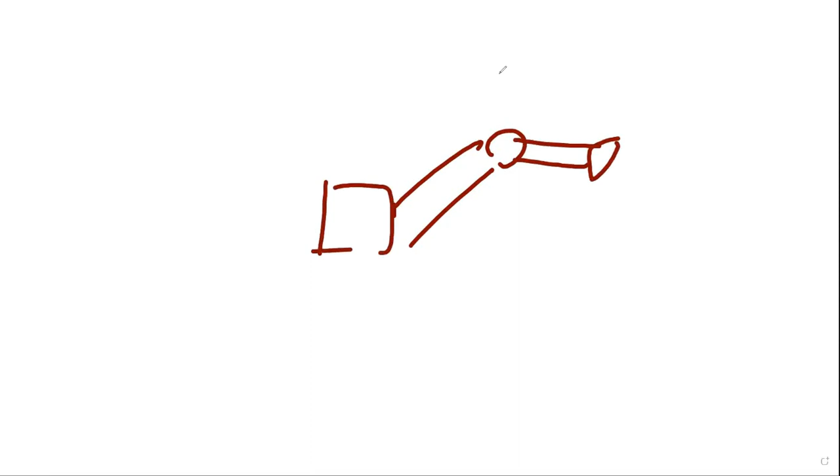One is the manipulator system, so you do have a robot arm to pick up something, and you do have the tractor, wheel, or leg. That is the vehicle part. So both the robot arm part and the vehicle part have a feedback loop.

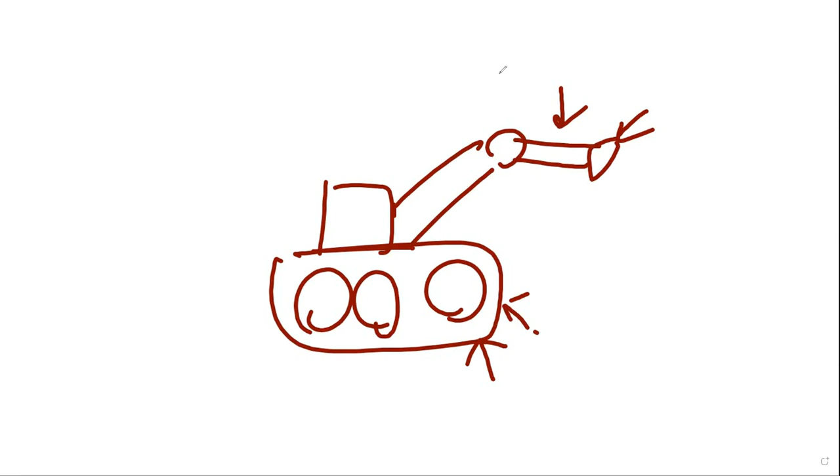And you may have a vision unit, audio unit, or ultrasonic unit to sense the environment. Once you sense the environment, you need to build a 3D model for your environment, so you know where you are, what is the obstacle, and how you should move your arm to reach it, or decide to give up. That's actually a system that helps you to manipulate your system.

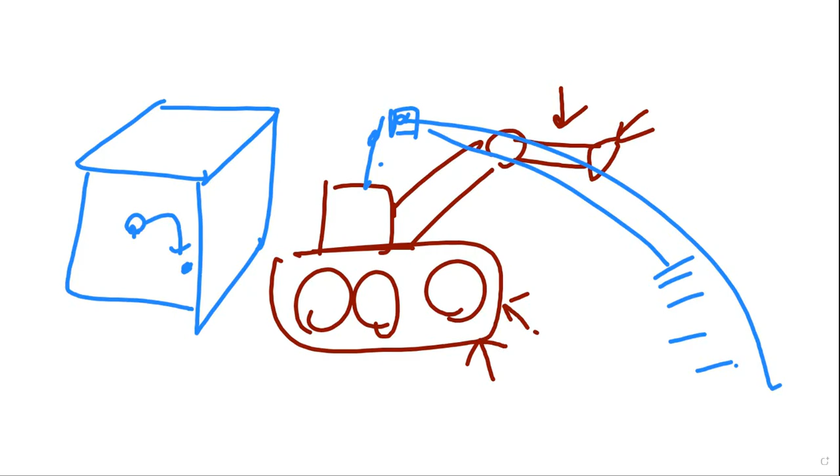So the mobile robot, in a way, is actually talking about the vehicle part. The vehicle part is the wheel. Sometimes it's the wheel, sometimes it's a leg, sometimes it's a rocket or propeller system. Whatever system it is, it just helps the robot move its body from point A to point B. That's the mobile robot.

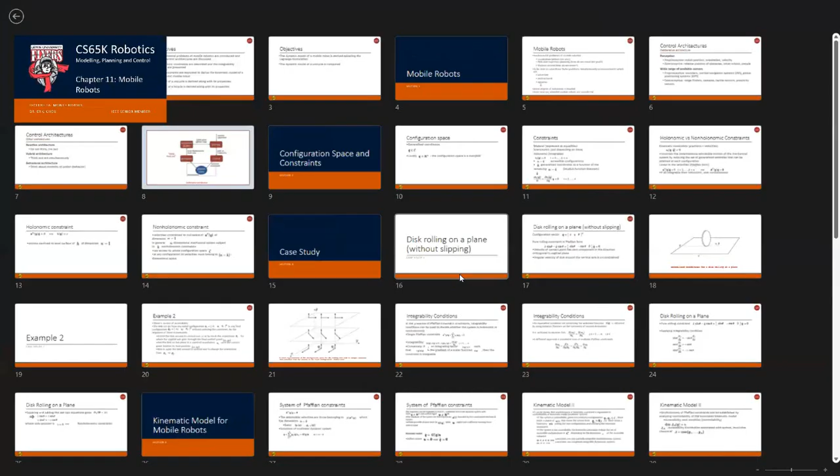And the same thing, you will have the sensor portion to sense the environment, and you need to build up the 3D model of the environment and feed it back to the whole system to try to sense it. So in a way, it's similar to computer graphics, because the image that you take from the environment will be fed back to your computing model, and the computing model is your understanding of the environment.

So here you need to move your vehicle, say maybe a bicycle or unicycle, to move along the path and then avoid some obstacle, something like that. So you need to build a model for it.

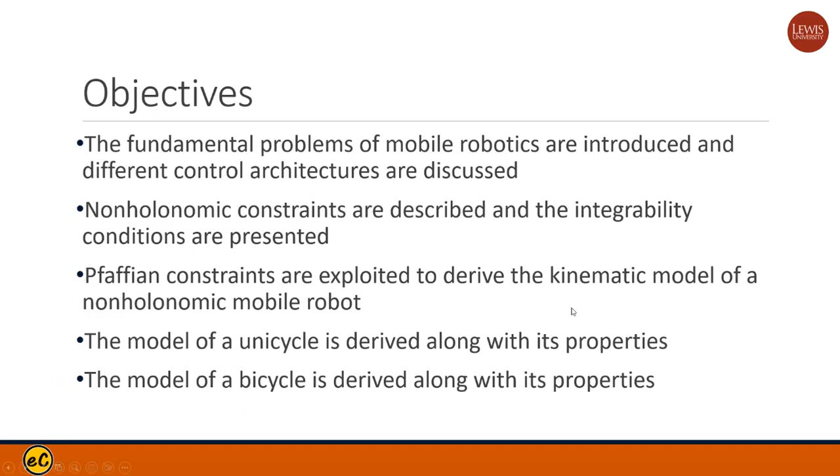So mobile robot's fundamental problem is the localization of where the robot is, the path and trajectory planning, and motion control - how much power needs to be applied to the motor, the torque, the force, how fast should I move my wheels - so as to be able to solve these problems simultaneously in an environment which is uncertain.

Uncertain means that you may be in a battlefield, so your environment at one second is this way, but the next second the whole environment may be being bombed. So the environment may change in a second. Let's consider, for example, that you have a robot combat system in the Ukraine area, and it's actually an autopilot car, or an autopilot tank, and the environment keeps changing because suddenly there will be some change in the landscape.

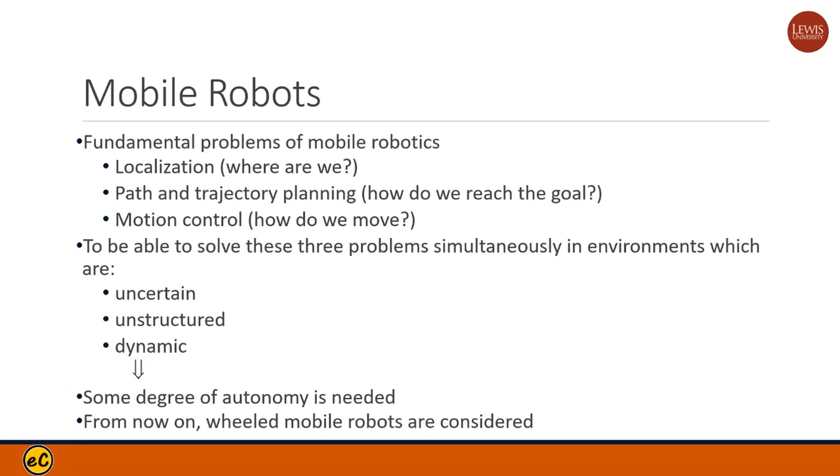Suddenly your enemy may be moving, and there may be some obstacle that just dropped. So the environment is dynamic, and your visibility may drop because they may give you some smoke to block your vision or your ultrasonic sensor. So basically you need to take care of all the sensor information and try to come up with the best estimation of the environment and make the right move.

So basically, perception is very important. Perception is the robot's position, orientation, and velocity.

Proprioceptive, and then you need to know about exteroceptive, that's the relative position of obstacles and other robots. You need to know where you are, and you also need to know where other people or robots are. You build up your environment using modeling, using your sensors and information, using GPS, rangefinder, camera, tactile sensors, or proximity sensors, and build up your model for the environment, and then operate your robot in that environment.

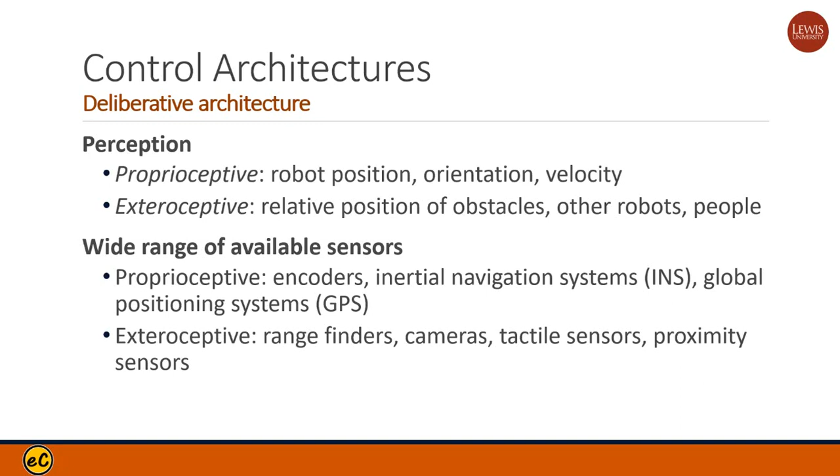So there's reactive architecture, which does not think. Reactive means you do not have planning, you just sense the data and react, that's the reactive architecture. There's also hybrid architecture, which has sense, planning, and react systems combined. That's hybrid. And there's another one that's purely behavioral architecture.

Behavioral architecture is somewhat like an event-driven type of architecture. There are many event-driven handlers, and once an event happens, you trigger something. For example, a counter or anti-missile combat system: a missile comes in, closes into a certain range, then you fire your anti-missile to try to shoot it down. That's behavioral architecture, driven by automatic detection.

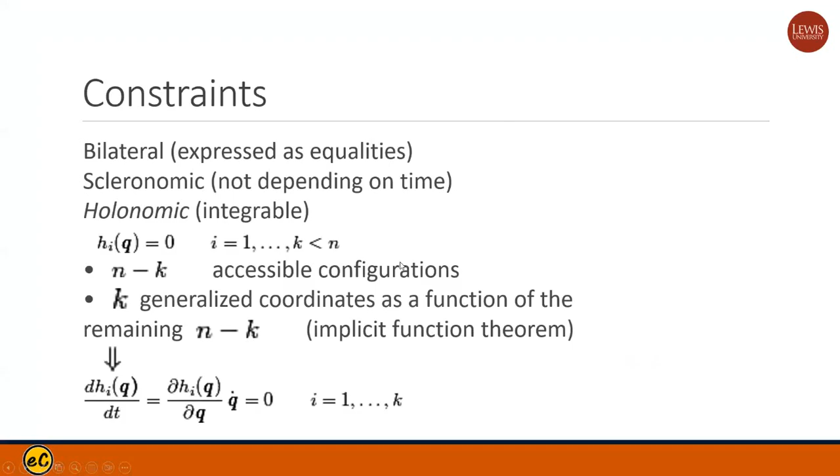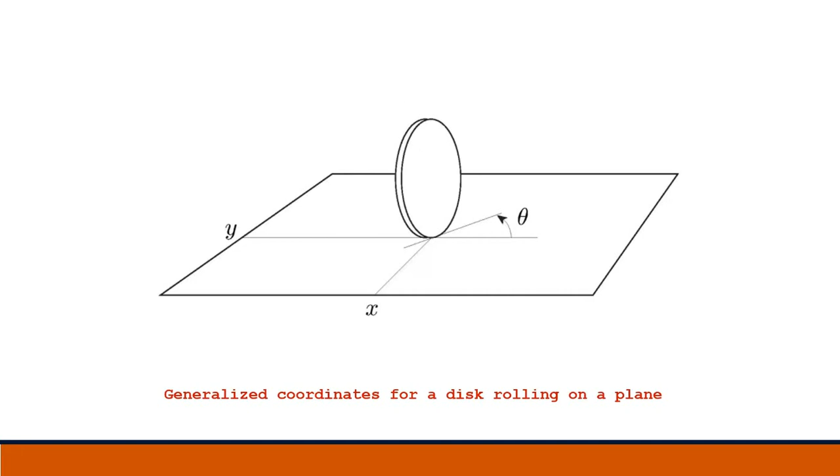And here we do have some math, but this portion I will actually just bypass, it's too much. You have a disk rolling on the plane, and there's a controllable parameter called theta, and you can control the rolling to achieve it. These are more complicated math that we'll try not to go into detail on.

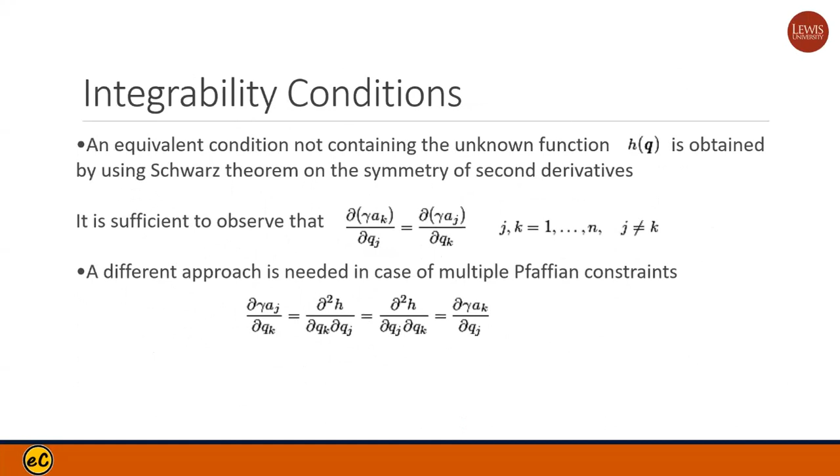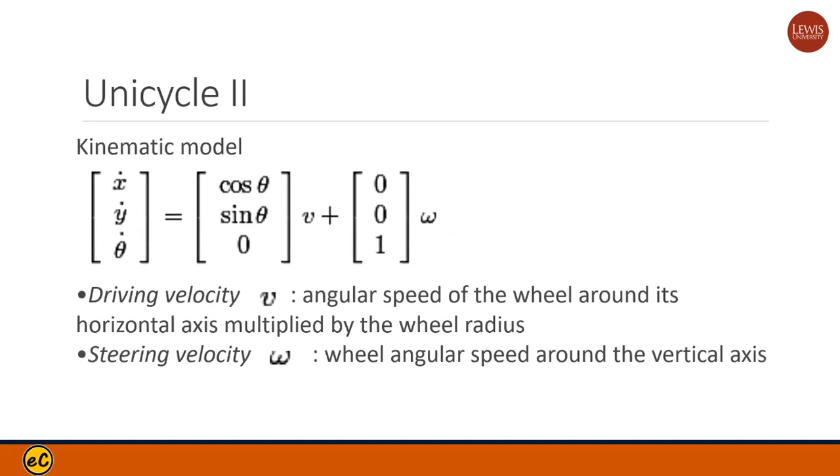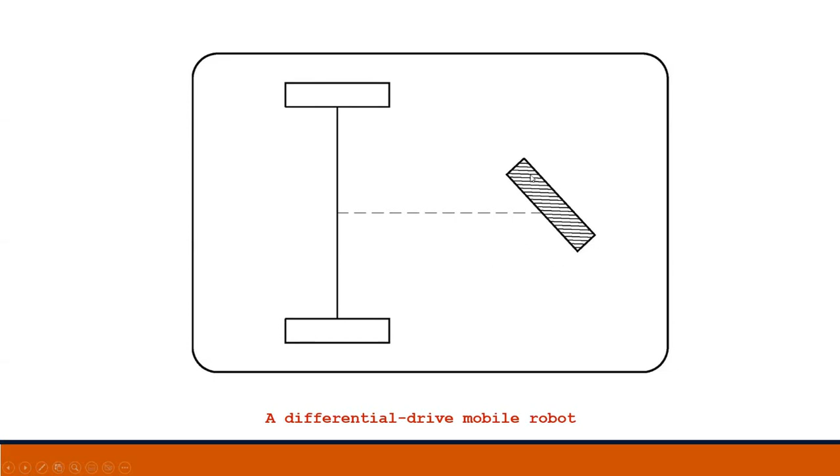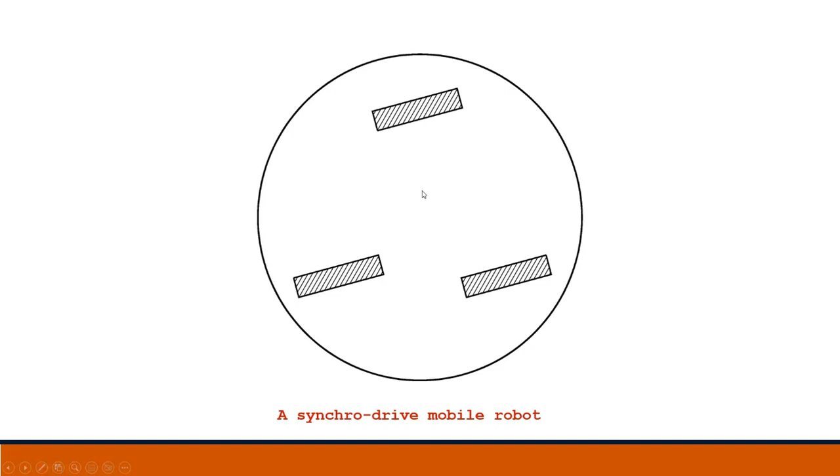Unicycle: only one wheel is actually the controllable unit. The other two wheels may be moving, but they have no control of theta, and they are not driving. So this is a one-wheel self-driving robot vehicle. You can also have a synchronized drive, where all three wheels coordinate their motion at the same time. And you may have a bicycle with two wheels that you can control, with some mathematical model.

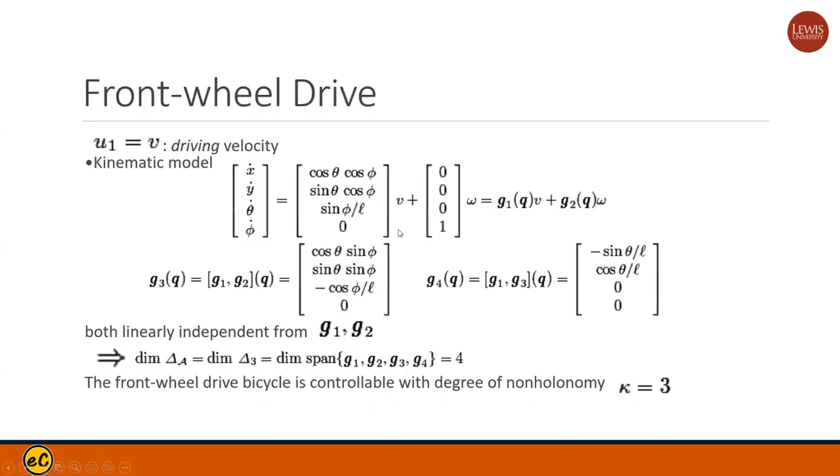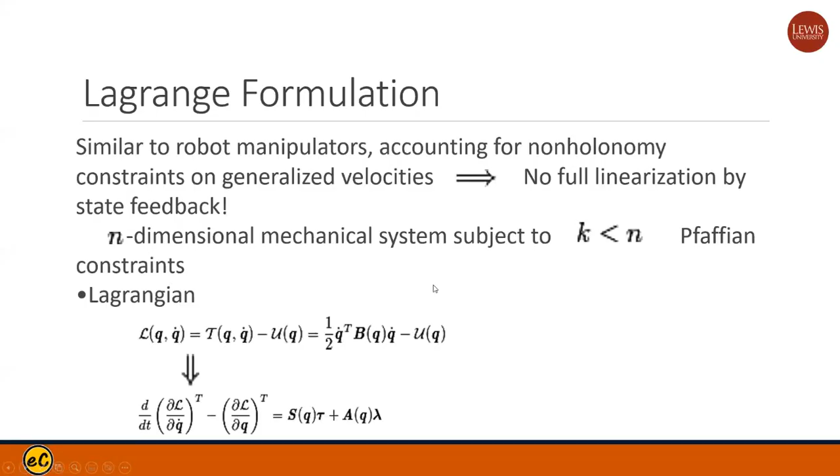And tricycle, three wheel, four wheel systems - your front drive car or back drive car is something like this. This formula I'll try not to go into those details, it's too much, it actually takes a long time to understand it.

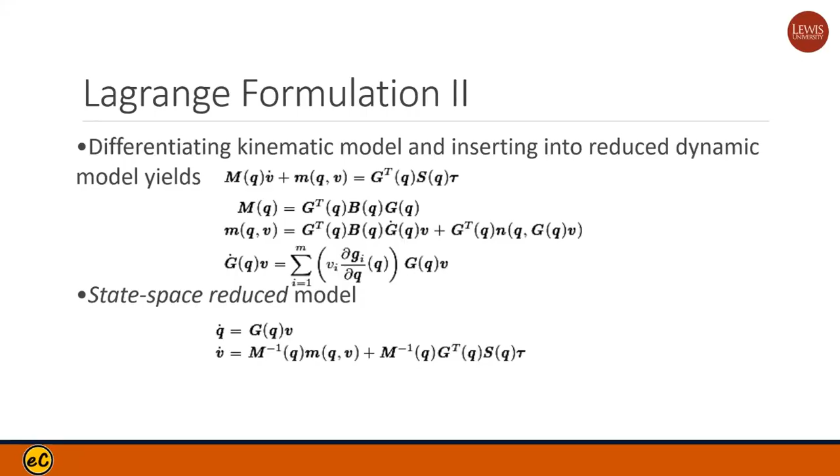So here we basically roughly went through this whole chapter. The key point for this chapter is we try to sense the environment and then move your vehicle to the right location.

And then let me go back to here. Last time we did low level control. Let's look at robot control now. So for robot control, we're not talking about low level control, that's actually a feedback loop.

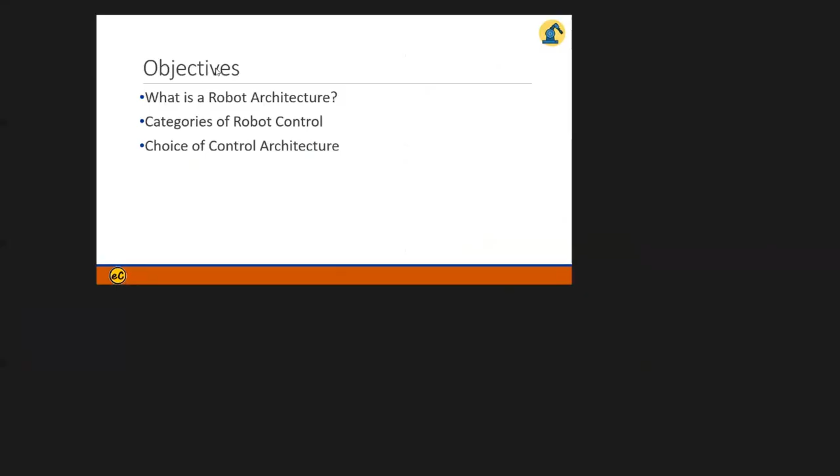There's a PID controller, and a high level controller is a finite state machine or microprocessor. So in a way, you will program your robot to control your feedback loop and also your robot motion. So that's the architecture we have.

So robot architecture is similar to computer architecture. Computer architecture is the architecture for a personal computer, and robot architecture is the architecture for the robot. So in a way, robot architecture is also an extension of computer architecture. Your computer architecture comes with an operating system operating on your instruction set, and the same thing applies for robots, you have that whole set too.

So you can build your robot using ASIC, application-specific integrated circuit, or you can build a microprocessor using robot OS. ROS is robot OS, using robot OS to build a robot.

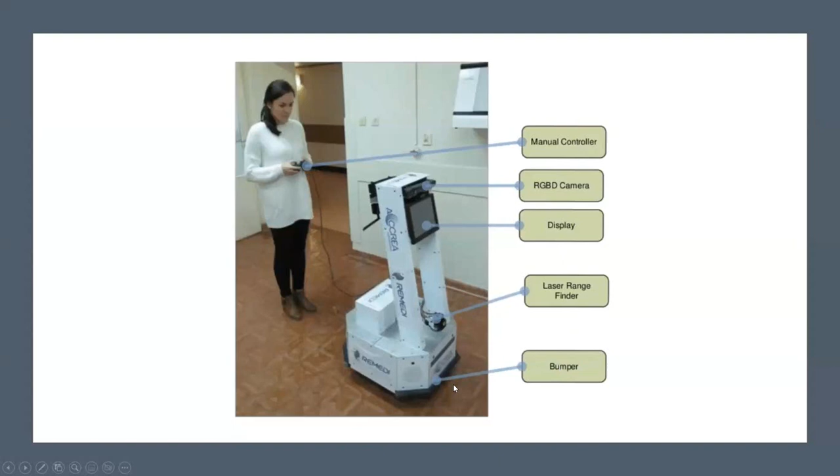Your control has hierarchical control: there's sense, plan, and act. You have the relative reactive control. Reactive is you sense and react, sense and react. Someone hits you, you counterattack.

That's reactive. And then traditional is the sense, you do planning, how far the enemy is, and then take action. That's a hierarchical way. And the third one is behavioral based.

Behavior based is the event-driven one. You sense, plan, and act, but you will choose the right one to act. So it's somewhat like you choose the right event handler to run your robot operations.

And you can also design it so that it's a hybrid. Hybrid means that you are partly deliberative with planning, partly just reactive. Reactive control is faster because you sense and you react. The hierarchical or behavioral based takes longer time because you need to use the computer to do planning. So the hybrid one actually combines the two.

Sometimes you use direct sensing and react, sometimes you actually add the planning into it. So this one is actually different. But nowadays, because of AI, the planning becomes not just using the algorithmic method, but maybe also using the AI approach, machine learning approach.

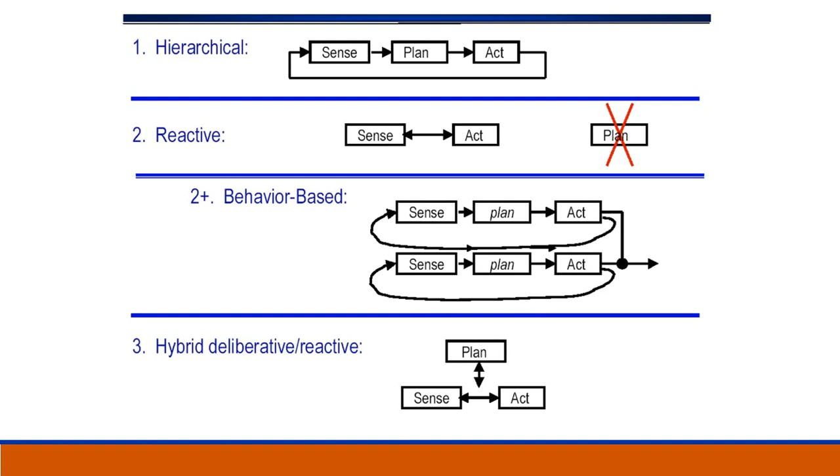So this portion, because of the advancement of the microprocessor, the performance of such architecture is more robust than before. So these are different categories of control: deliberative control, reactive control, hybrid control, and behavior-based control.

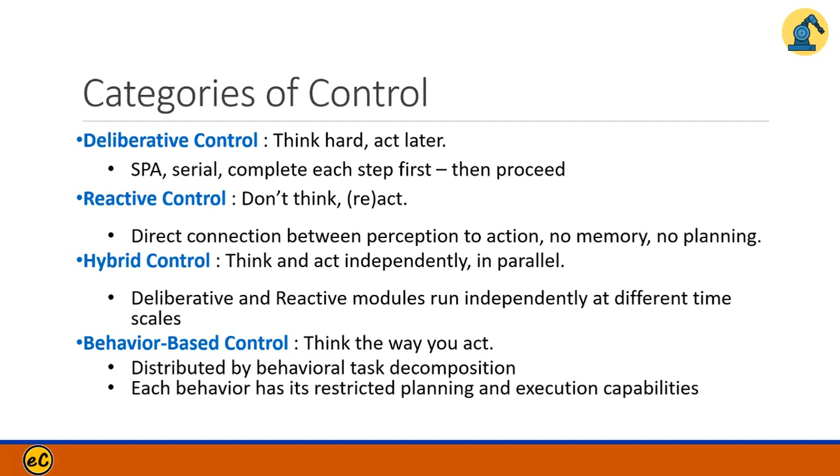So you have sense, plan, and action. This is the deliberative paradigm. Sense the world, update the world model, and then generate a plan. This is typically the deliberative paradigm. The problem is the planning would be the bottleneck.

It is a computer, it is a microprocessor, a computer, so it takes longer time. If your planning takes too long, and this planning may also involve AI, it actually depends on the decision quality and how much time or latency you can tolerate.

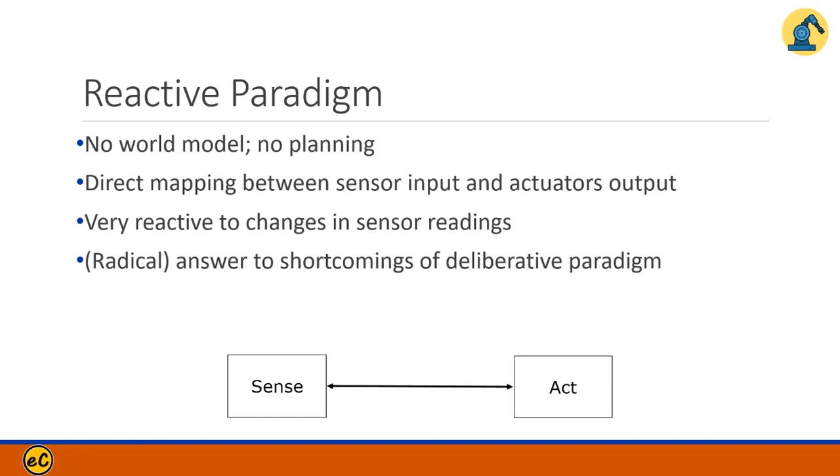Reactive is that you do not do planning; it just senses and counterattacks. So it's faster, but the problem is that the decision is sometimes very poor because you do not think about it. So in terms of process speed, reactive is faster. In terms of decision quality, deliberative is better.

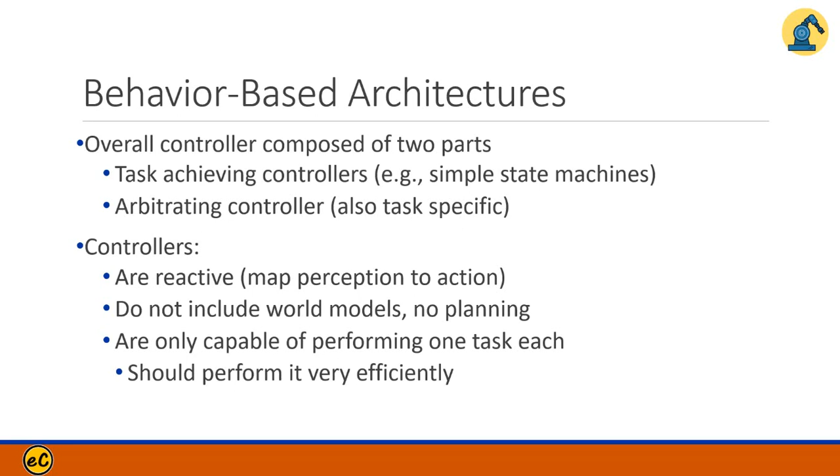And the behavioral based architecture is that, it actually has planning, but we can have multiple processors to do it in parallel and take different events in different ways. We have an event-driven way of doing it, and then we have an arbitration. The arbitration will decide what I should do.

So as a robot, you can push the door, go through the door, approach object, or follow a wall. So these are four different plans, four different events that you may be calculating. And the arbitration will pick one for your robot to use.

So behaviors are the basic building blocks for robotic actions. You can consider these behaviors are the functions, the methods, the basic event handlers for a robot. Behaviors support good software design principles like modularity, so you can update one behavior at a time to update your robot operations.

So here you do have an arbitration. Different behavior-based architectures have different approaches to provide arbitration. So the hybrid paradigm uses a world model for planning with closed loop reactive control. Many architectures of today follow such a paradigm.

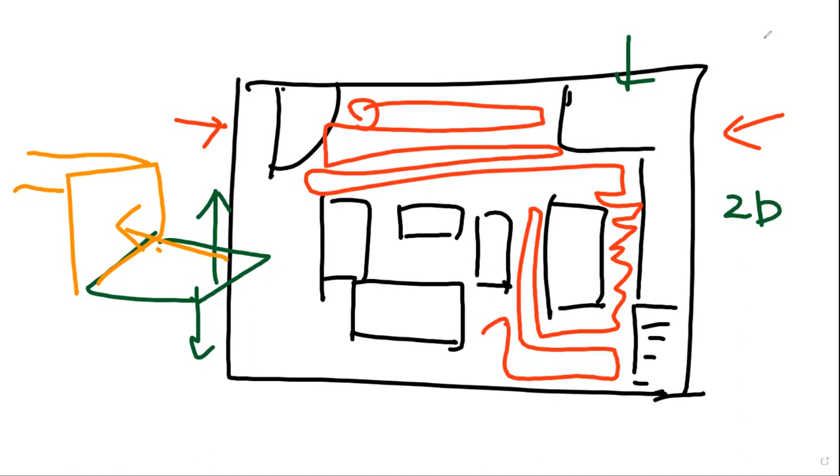And iRobot just needs to go forward, follow the wall, approaching, okay? And iRobot does not have the open-the-door option because it is not a real robot, so there's no robot arm to open any door, nothing like that. So you just need to go left, right, up, down, sense the environment, and build up your two-dimensional graph for it.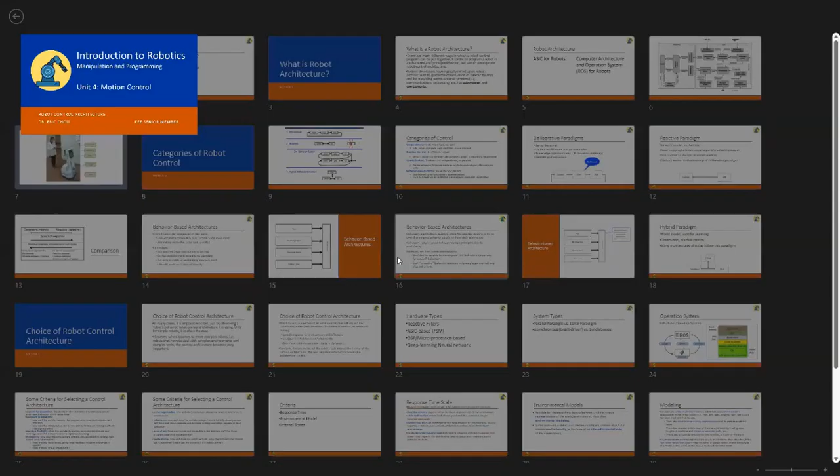Okay, so that's actually the architectural requirement for the iRobot. Now, based on that requirement, you have to think about what control strategy is best for your iRobot. So what kind of processor do I need, what kind of sensor do I need to have.

So here, because you really do not need a sensor for color image—no, you don't—because the environment's color being yellow, red, or black doesn't matter. So a monochrome camera is good enough, okay? But it does need to be able to sense whether this is an obstacle: can you pass vertically or not? That actually is the key element you need to have.

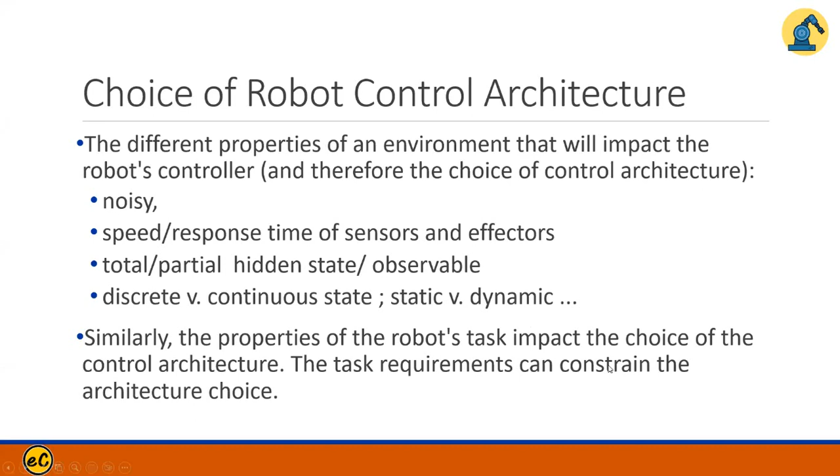So you may use the ultrasonic sensor to see how far the obstacle is. And also you may use a black and white image to build up the map, okay? And you may use a microprocessor to control the movement, okay?

And since it's an iRobot, you might have a disk-like operation. So you may have an iRobot with two wheels and maybe only one steerer—a tricycle with one steering wheel may be good enough to drive into different directions. Or if you want to use three synchronized disks to make a rotation, that's also okay. So basically, these are things you need to figure out: what kind of wheel you need to have, and then also find the right processor for it.

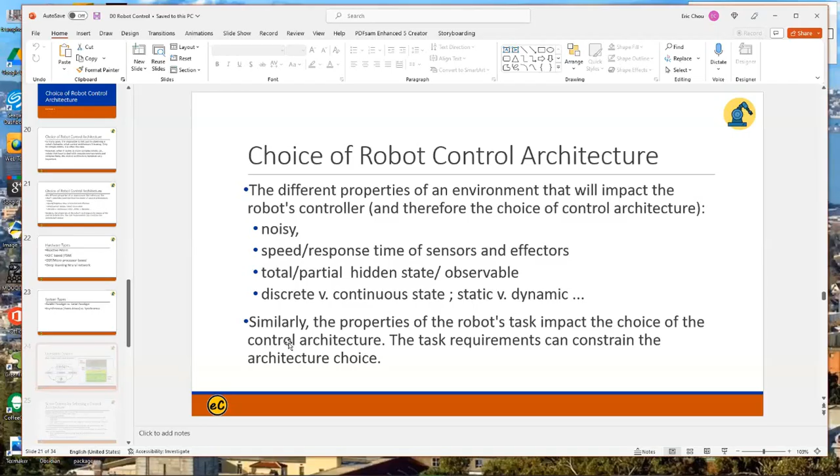Okay, and now you need to find an operation system that can handle it. So there is one consortium called Robot Operation System, Robot OS. So there's a consortium called Robot OS, and this Robot OS is one OS that can be used to develop different robots.

Okay, you can also use Linux, whatever system. This robot OS is one OS, Linux system is another OS, and these are okay to drive your processors.

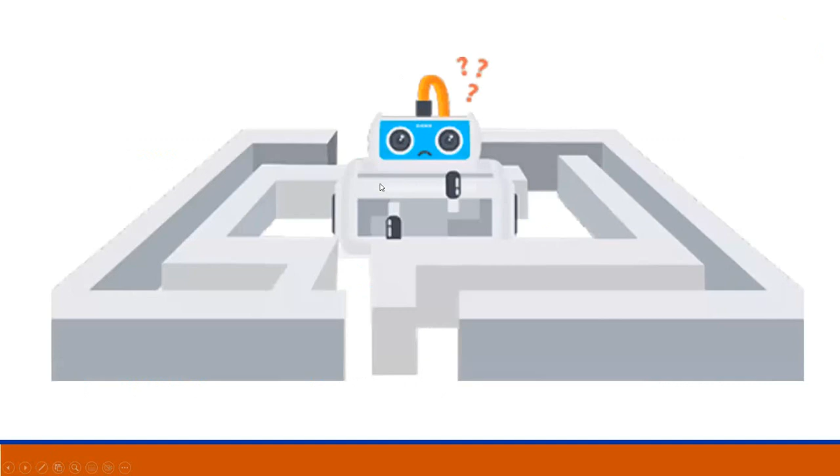Okay, so these are some more detail in the design, and something you need to build. The last comment is, the planning portion may be a microprocessor, but you can also use reinforcement learning to learn your past parameters and then update your system.

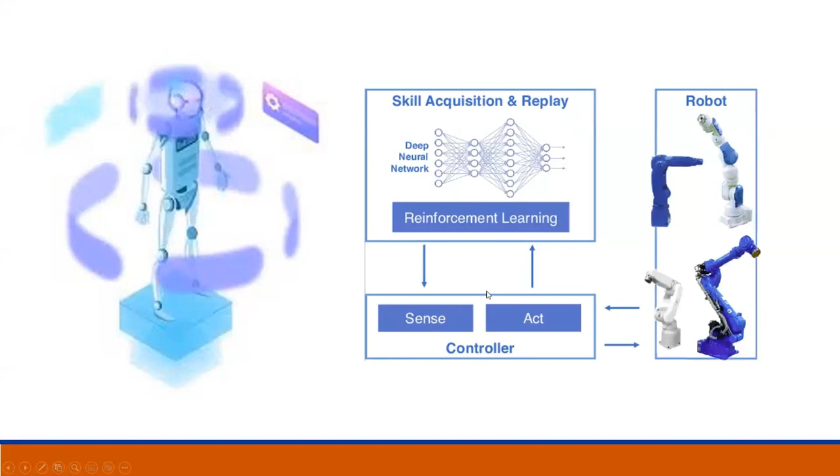So you can also bring machine learning and big data into your robot system. Okay, that's it for today. Any questions so far? I went through the robot control for mobile robots. Any question? I don't think so. That's the last chapter, okay. What's any other question about this course so far?

How are you so far in this course? I think I'm a little bit behind right now, but I've been working pretty hard on stuff. I've got a few assignments I'm going to turn in tonight, and I've been working on the final as well. Yeah, okay.